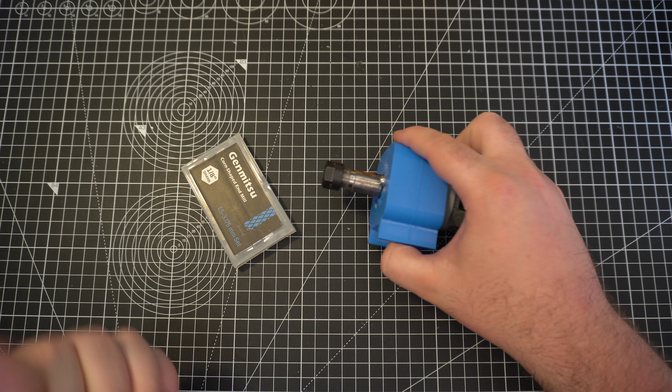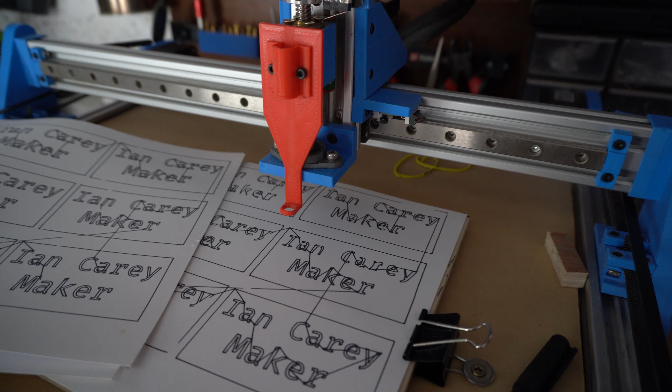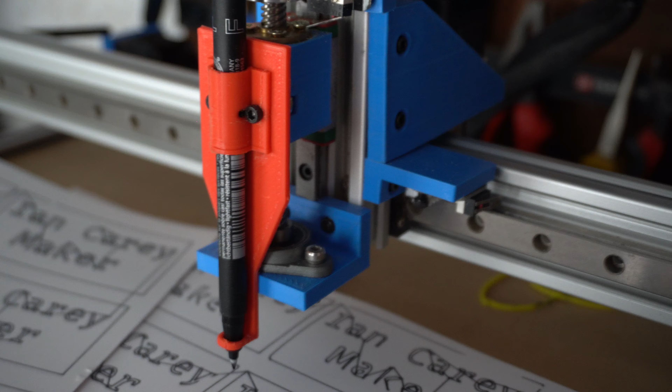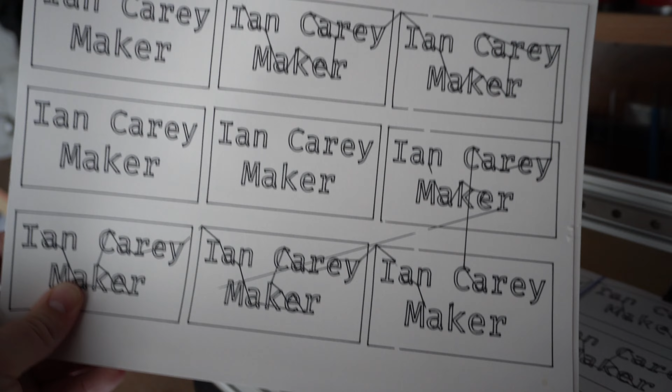So it hasn't turned out to be a super useful tool for a lot of different reasons. It was a great learning experience to put it all together, but there were quite a few problems with it that I want to address, because it's kind of annoying me that it's sitting out in my workshop and doesn't really get a hell of a lot of use because it's not super useful. So the spindle here not being attached to it is a bit of a clue as to how much use it's getting, because this isn't even attached to it currently.

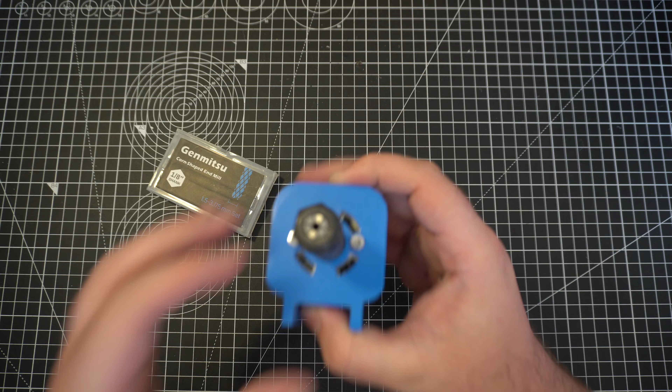The most recent usage it got, I should say, is at the Dublin Maker Festival last summer. I had it running as a demo piece, and I had made a special pen adapter for it, and it was pen plotting out business cards for me. So that's the most use it's gotten in a while. And there were a couple of reasons why it sort of didn't end up getting a lot of usage.

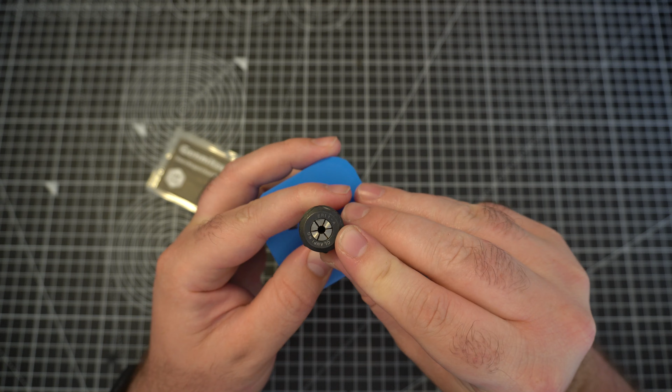I had gotten some feedback on it, and I actually decided that I wanted to address some of the points, because I think there's one really simple thing which I want to talk about in this video specifically that might make a huge difference. So we're going to try that, and hence why my spindle and some end mills are in front of me. So I'm going to go into a little bit of detail here about the end mills that you use, which are the little cutting tools, and why I think that might make a bit of a difference. So that's what we're going to try in this video.

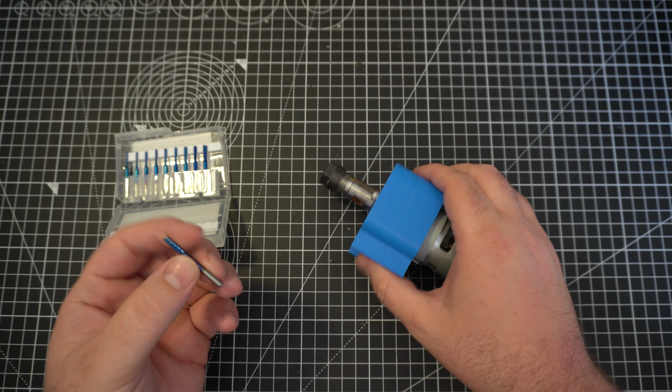Okay, so this is the spindle. Spindle is quite simple. It's a motor that has pretty high speed, 20,000 RPM on this guy. And mounted to the end of it is a little adapter which holds a collet. So this is an ER11 collet. It's just basically the size of the collet. So you unscrew this little nut and the little collet opens up, and then when you tighten it down, that'll squeeze evenly, holding the end mill concentrically.

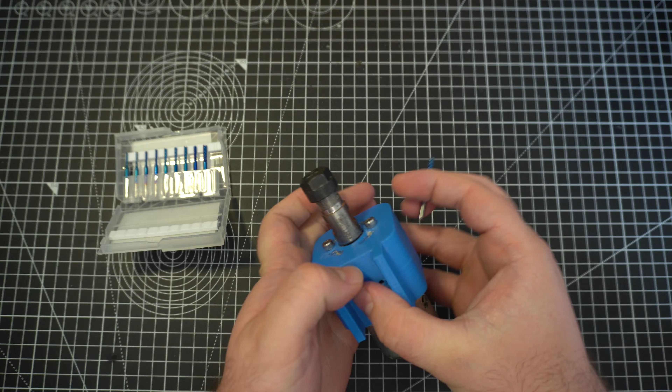So when I was building the machine, I bought this little set of the cheapest little end mills that I could find on Amazon, literally not knowing at all what I was doing. So these are the little blue fellas, and these are all 1/8 inch shanks, which is about 3.1 and change millimeters, and they are the right size to fit into this ER11 collet. So you open it up, it's just loose enough for that to fit in, and then you can tighten it down and it'll clamp down with pretty good holding force there. So that's how you mount your end mills into the collet.

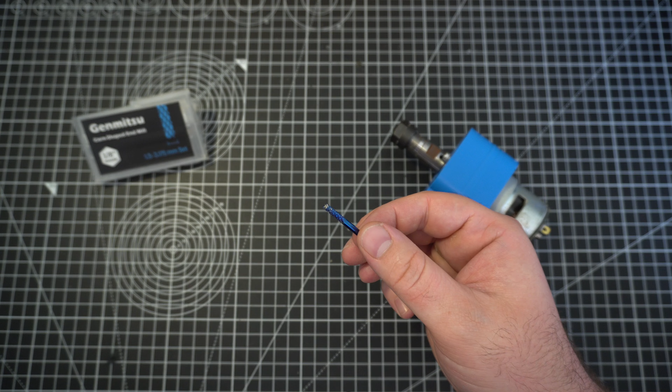So really where I want to draw your attention to is the profile on the teeth of these end mills. They're slightly different diameters, but they're all the same cutting geometry basically. So if we zoom in a bit, it might be easier to see if I can get this to focus, but basically there's our geometry. So you see what they call these is sort of corn-shaped end mills, and they've got this real rough pattern of all these little individual teeth that kind of looks like a little diamond pattern.

So what I was trying to do with my CNC machine is I was trying to cut wood with it basically. And these little guys, they're not really made for cutting wood, funnily enough. And so the machine had a lot of trouble with that. What these are kind of more designed for is things like PCB engraving.

So you've got these tiny little dudes here, and these are the perfect kind of size and the perfect type of bit that could basically carve away some copper traces and a little bit of fiberglass on a board so that you could make milled PCBs, which kind of makes a lot of sense.

These have a very small little tooth on them. They're quite fine. It kind of almost reminds you of a little grinding tool that you put into a Dremel. So it kind of makes sense that they'd be able to engrave into hard materials, or cut through quite brittle materials like fiberglass in a PCB.

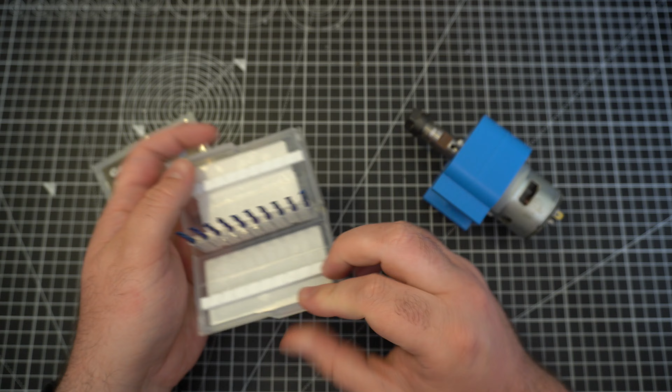That's my theory anyway. That's what I think was going on with why this wasn't working very well for cutting wood. These little tiny chips can't really bite deeply into the wood, and also they weren't really able to clear any swarf that they were creating, so you didn't really get chip clearance. So it was causing a lot of chatter in the machine.

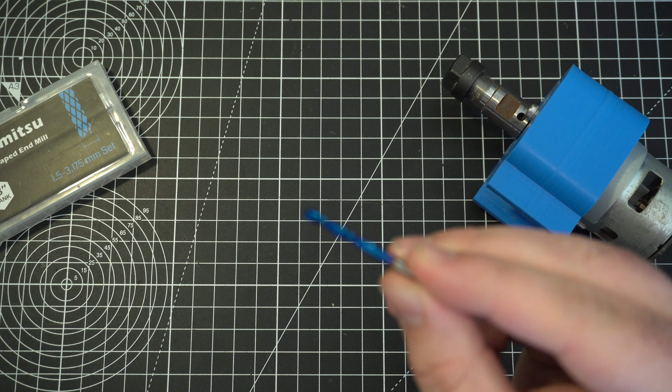It wasn't really working too well. So that's just a theory I have based on some feedback I got from some people and some ideas I've picked up from watching a lot of different machining and milling stuff on YouTube. So with that in mind, I bought some new endmills. These are the same brand, but just a slightly different profile. They're the same 1/8" shanks, but these are all the same size as it happens.

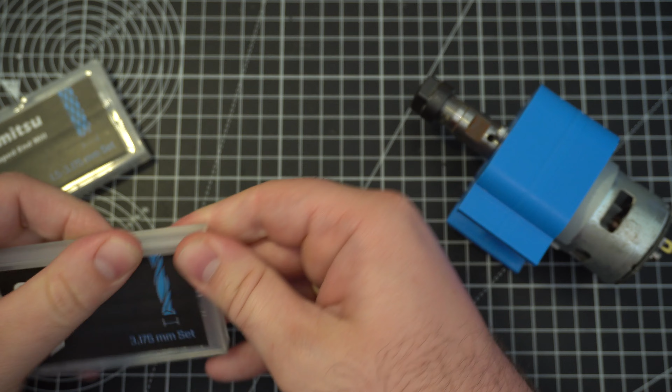And I can show you the difference. These are flat nose endmills, so they've got just this flat end on them. But what's important is, if I zoom in again, they have these two flutes. Focus is difficult. Come on. There we go. Might be as good as we can get, but basically they have two radial flutes that run the entire length. They're quite sharp and relatively deep as well, so there's a couple of millimeters of depth in each of the flutes.

So the theory is that this little guy, oh, that's a better focus, should be able to cut into the wood quite deeply and effectively clear the chips away from it as it moves. That's a theory anyway. So I'm going to try it. I'm going to reinstall the spindle onto the CNC machine, take off the pen mount, and try this guy out. And that's really it. I don't have a huge amount else I want to try.

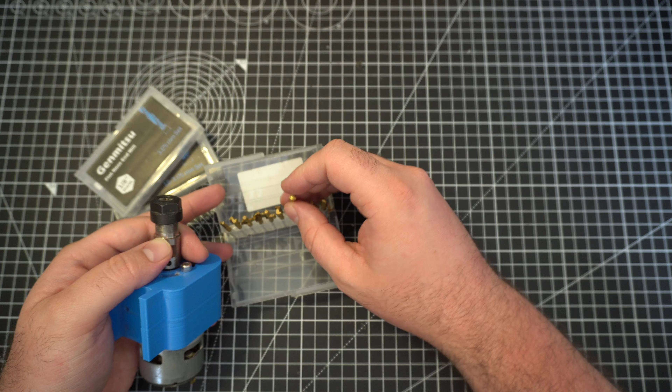There is one other thing. While I was thinking about these different endmills, I realized that I had yet another thing that might be helpful. I bought this little box of mini router bits ages ago. I had bought this little adapter kit where you can put a Dremel into it, and it turns a Dremel into a little mini palm router thing.

And I bought these tiny miniature router bits. It's a full set of all different kinds of router bits that all happen to have an 1/8" shank. So that's about perfect for going into my ER11 collet here, which will hold that just fine. So I can try that out and see if any of these will help at all. It might not, but it's interesting to see. And if they do work, I've got a whole selection of tools with different profiles that I might be able to use for other things, which is kind of cool.

So yeah, that's the next thing. I'm gonna set up my machine. I'm gonna check, see what happens with all these little dudes, and yeah, we'll see what results we can get out of it. One thing that I do want to do first, which actually I think I'll jump into next, is

I haven't used Fusion 360's CAM yet. So back when I was working on all this CNC stuff, I was mostly using FreeCAD, and I was using FreeCAD's CAM workbench to be able to do the CAM so that I could plot out my tool paths and everything for the CNC machine. Now I'm using Fusion 360 for everything, and I've actually never used the CAM workbench there. So I'm going to take a look at that.

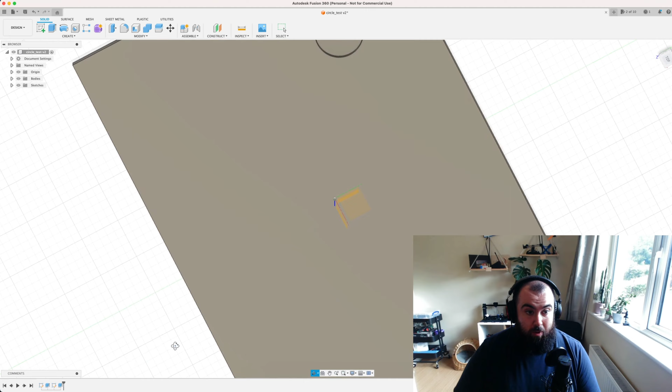Okay, so let's have a look at some CAM here. So I'm in Fusion 360, and I've created my model here, which is really simple. It's about as basic as I can make it, which is the idea for this whole test. I wanted to make a really simple model with a really simple thing that I'm going to cut out, so that I can eliminate as many variables as possible with the test.

Just a simple cut, so I can try and isolate what the endmills are doing, what effect they have, as opposed to any sort of weird toolpath stuff or depth of cuts, all that kind of stuff. So what I've got here is this really basic model. What I did was I created just a solid model which represents the stock that I'm using. In this case, I have a bunch of sheets of 6mm thick plywood that is A4 sized. So that's what I've got here.

I've got my little rectangle of stock, and all I've done in terms of the features that we're going to want to cut is I've added this tiny little round pocket here, which is 3mm deep. The other thing I noticed before when cutting through this material was that the 6mm depth of cut seemed to be maybe a little bit aggressive. At least it was with the old corn-shaped end mills that I showed you guys earlier. So I'm going with just a short 3mm depth of cut.

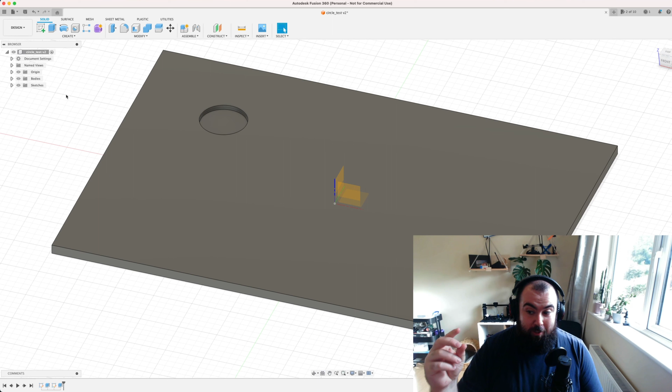Now that could prove to still be too aggressive, so maybe you need to go less, but effectively we've got this fairly small amount of material that we're going to be removing. This is, I think, 30mm in diameter, so it's not huge. And basically what we want to do is put this piece of stock into our CNC machine. We want to click the button and we want it to cut out this little pocket for us.

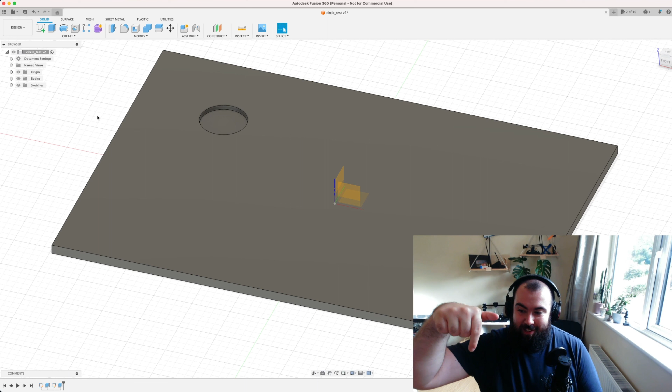So to tell the machine how to do that, we need to use the CAM tools that are built into Fusion 360. If you understand a little bit about 3D printing, maybe you understand the idea of a slicer. People who are familiar with 3D printing will know that just because you can 3D model it doesn't mean you can 3D print it. You can design in CAD or in Blender or in all sorts of different 3D modeling software, basically literally anything, but you can't just make anything.

Your 3D printer can't just start printing in midair, that kind of thing. And your CNC machine can't just get in at the backside of any material. There are limits to what these machines can physically do. So in 3D printing, we have a tool called a slicer, which effectively is the CAM tool that's very specific to an FDM 3D printer, for example.

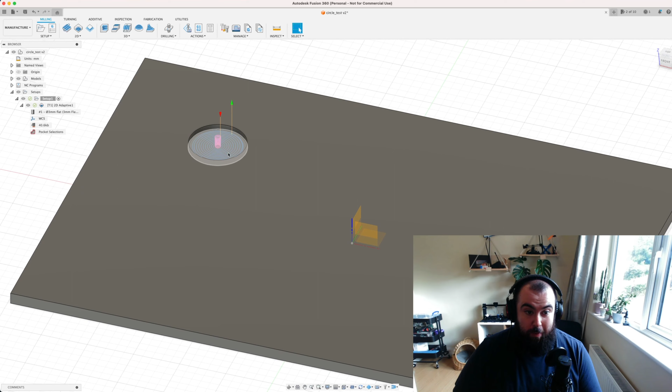So in our case, we're just saying CAM generically, but effectively what CAM is going to do for us in this case is it's going to take our 3D model and it's going to build a set of instructions, which when fed into our machine, in this case my DIY CNC machine, will make the machine do what we want. And this is the exact same as how a slicer generates your G-code, which is what tells your 3D printer how to make the parts you want to make.

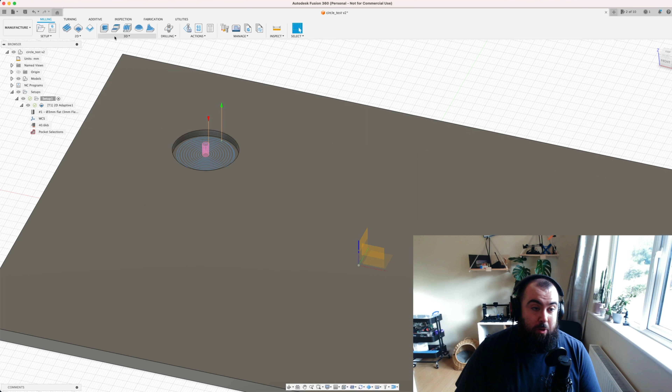So to get into this workbench in Fusion 360, you go up here to the top left where it says design, and we're going to select manufacture instead of design. So this dumps us into here, and you can basically see the guts of what is needed already. So I already prepared this, but I'll basically go through what I did and explain what this means.

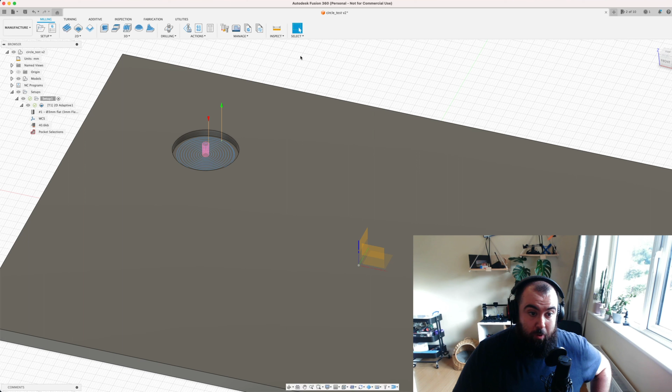So for this case, we're basically just working pretty much in 2D. There's nothing super complicated here, and 2D with depth. So this is the difference: you can have 2D stuff and you can have 3D stuff up here. The difference is basically with 2D stuff, we're just working in the one plane. We're not doing anything that has angles on that plane. So if we had angles or curves, tapers, that kind of thing, then we'd be using the 3D tools, but we're not, we're using 2D.

So although there is a Z dimension to it, we're always just machining in one plane. We're not making angles, like a cut like that or anything like that. There are no angled faces or anything like that.

So I can go up here. This is about the simplest method you can use, which is the adaptive clearing path. So like it says there, it's a roughing operation. It's not meant to be fine details. It's meant to just be an efficient way of clearing away lots of material. So we're going to use that path, which is about the simplest one you can use.

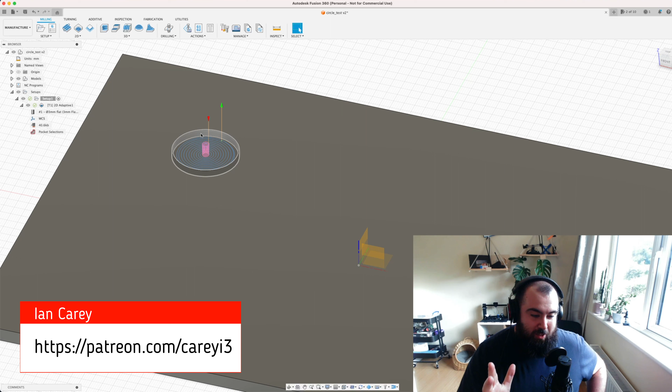So if we click on this, it'll bring us up a little dialog. I'm not going to click it because I've already done it. But effectively, the guts of what the dialog asks you to do is select a geometry that you want to adaptively clear.

So some tools make this a lot easier than others. In FreeCAD, which is what I've used before, it's a little bit cumbersome. In this, it's so easy. This geometry was ready to be highlighted. I moused over it, clicked it, done. Effectively, almost as simple as that.

The only other thing that it asks you to do, which is a little bit more involved if you've not done it before, there's a little bit to read up on, but it's not too difficult, is basically select your tool. So I can show you here, the tool we have selected is basically a 3mm flat end mill, which, if you remember from earlier, is basically what the new mills that I want to try out are. So if we click on this, it opens up this wizard.

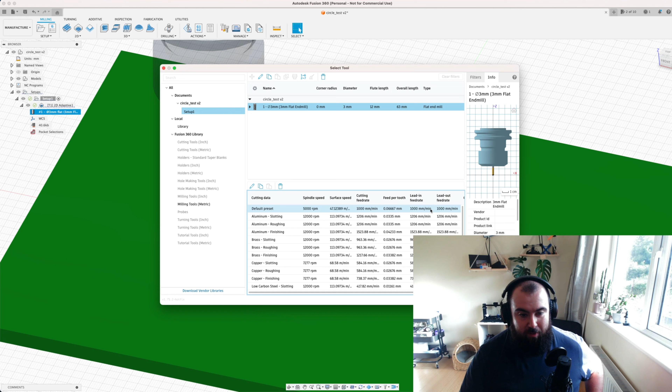And I'm not going to get into details about this, but effectively this is how you define how quickly the machine moves around while it's cutting and how quickly the spindle actually spins. So I have this selected, which is the default preset.

This probably isn't going to work, but I have it selected just because it'll give me some values and then I can mess around with it. I am going to mess around a little bit kind of by feel with this, because I'm not entirely certain what feeds and speeds I want to use.

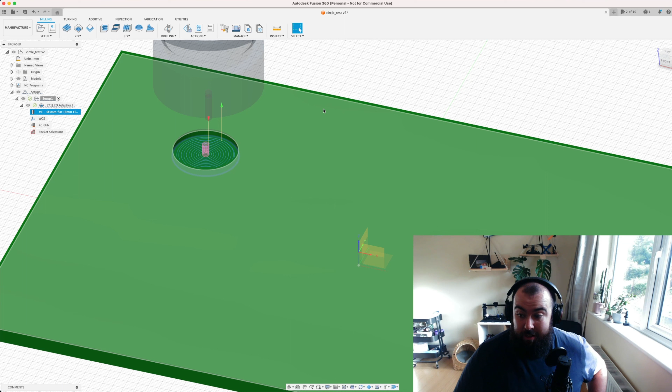So what I will probably do is I'll select a default, I'll generate my code for it, and then I'll run it on the machine without the stock, and I'll just observe how the machine's moving, and then I'll probably tweak it from there. So I'll either come back here and mess around with the settings, or I'll just tweak the G code directly. That's not too complicated to do, and then I can kind of iterate on that to get the feeds and speeds that I think I want, and I'll plan on testing a few different ones anyway.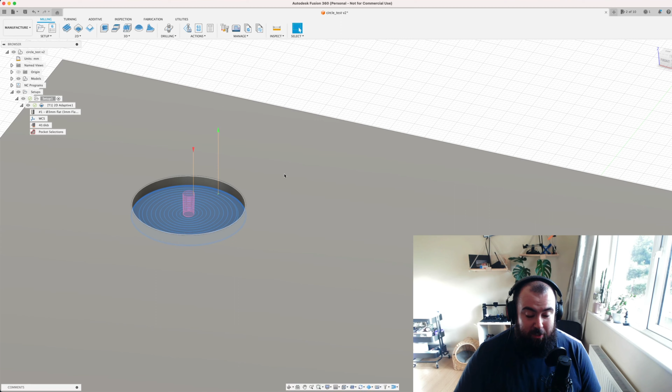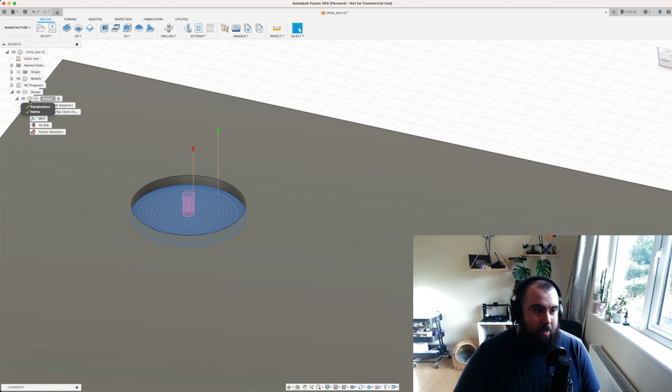So yeah, that's pretty much it then. You can select, and that'll do it. And that gives me this whole thing. So I've got my adaptive toolpath set up, I have my tools selected, and I've got the pocket that I want to mill out selected as well. And that's pretty much as complicated as it gets for the setup on this, which is remarkable.

I'm really impressed with how easy this was to set up compared to what I had done in FreeCAD before. Yeah, it's like night and day difference. Now, maybe people who know a lot more about this than me will tell me that there's better things in here or whatever. I don't know. There's probably better tools as well for professionals, but I think for a hobbyist, this is about as easy as it can get, which is fantastic.

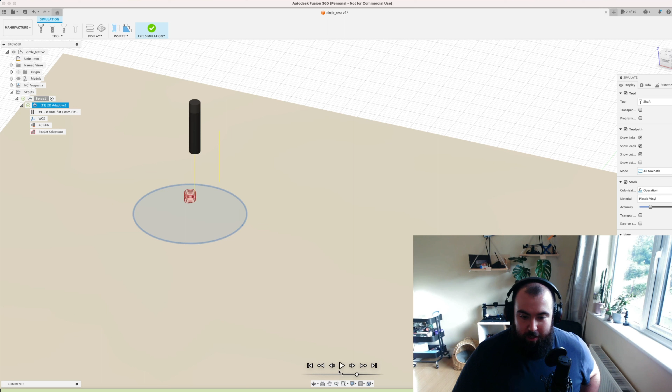So the last kind of cool thing that you can do here as well is you can simulate what this is actually going to do. So we see here we have all these kind of spirals and stuff, and it can be a little bit hard to see what's actually going to happen. So if I go into here to my setup and I click the simulate button, this is basically showing me from the start here how my tool is going to move and how it's going to remove the material.

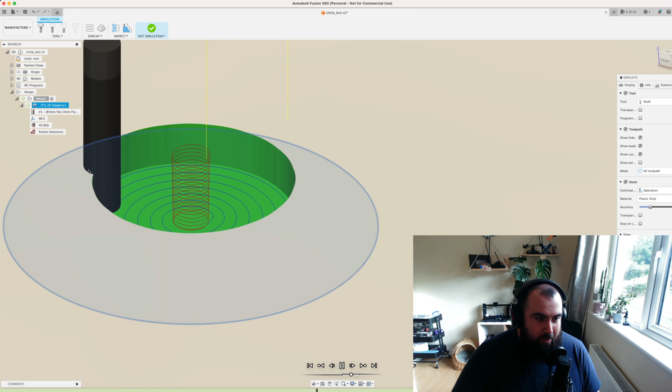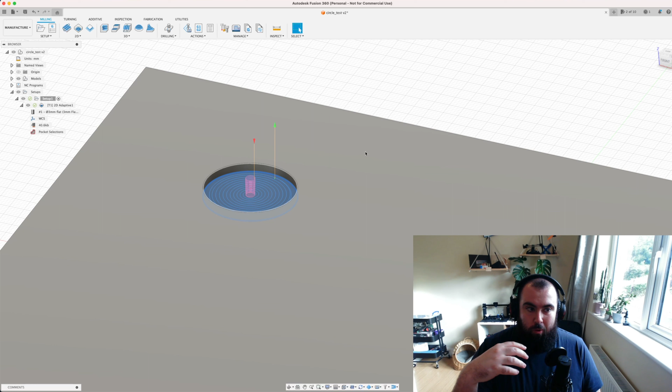So you see it starts up here, it's going to move down this line, it's going to start spinning around in a tight kind of spiral pattern until it gets to the depth at the bottom, and then it's going to fan out and remove material at a depth of 3mm until it gets out to the edge here, and then it's going to lift back up again. So if I click the play button, there we go. So we're down to the bottom, and now we're spinning around until we get out to our final width, and then up to the top.

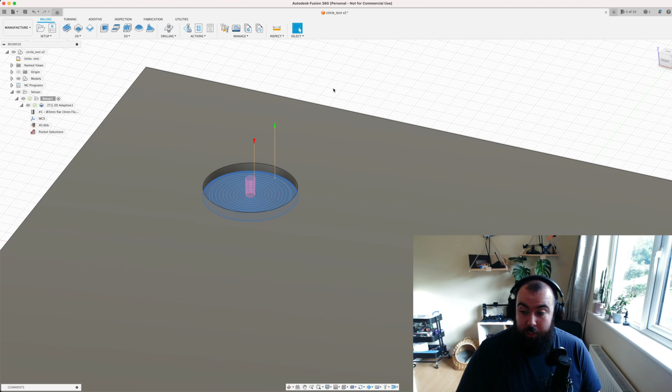And you can slow that down so you can really watch it. And it's kind of cool when you do that and you zoom in, you can see how much of the cutter is engaging with the material, which is pretty cool. So yeah, that's about it really in terms of generating your CAM profile basically.

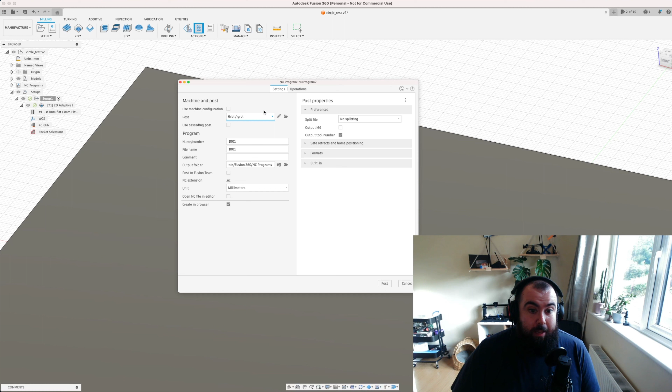So the next thing, once you've set all this up, you need to export all this to G code effectively for my machine. So if you hadn't watched my earlier videos, my machine is using an operating system called GRBL, which is basically an Arduino based thing that runs a pretty simple flavor of G code to do all of its movements. And it just so happens that Fusion 360 supports it as an output where you can target your post processor to point to GRBL.

So if you go into, I think it's up here, yeah, post processing, you can click here, and it basically gives you this little window where you can select what it is. So if you go to post here, you can choose from a library, and it has loads of different machines and types of flavors of G code you can select. GRBL is an option, so you can just use that preset, and then this will generate a file for you, which is all your G code.

And that's, again, pretty damn simple. So if we have a look at what that looks like, got it here. This is our G code file. So yeah, it's pretty standard stuff. If you've seen a 3D printed G code file, it doesn't look a hell of a lot different. We've got our X, Y, Z axis movements. We have spindle speed. We've got feed rates, all that sort of stuff. And yeah, that's really about it.

I think this is about just over 1,000 lines long. So if you're using some free software, you may need to chunk this up into different files. But I think the G code sender I'm using, free G code sender, I think it's Ultimate CNC, has an unlimited number of lines it can send. I think I must check that. Can't really remember. So we'll check that and see.

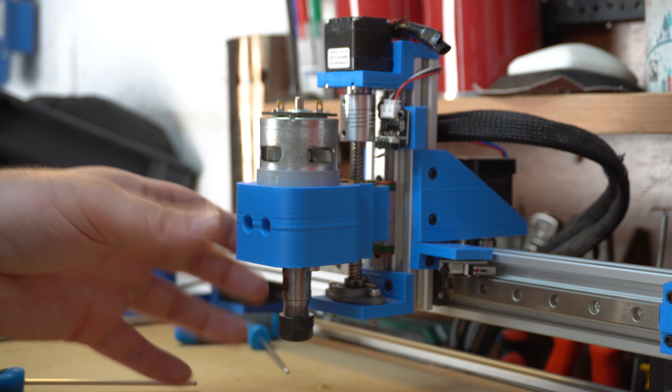So you can see here, the spindle will hold the little end mill here. All of the force that the machine generates is going through the end mill. So essentially you've got forces here in the X and Y, and also in the Z axis. And as I put some force on the end of the collet nut here, you'll be able to see the amount of flex that this little machine has. So that flex is really the biggest killer in this machine. So especially if you load that axially, you'll see there's a huge amount of movement there.

So if you had a really good, really solid CNC machine, you should be able to grab that spindle and try and force it as much as you can, and the whole machine shouldn't really move. Unfortunately, in this case, I just don't have the rigidity. So what I was noticing big time with those corn-shaped cutters was the machine's forcing to get the cutter to move through the material, and that was causing this thing to move a lot, because for the amount of force it was putting on, it didn't have the rigidity to hold up to it, and so the whole machine was bending, which obviously means that you're not going to cut anything accurately.

So I'm not fixing that rigidity problem today. I do have some things I want to do that might be able to fix that. But what I am going to do is, hopefully with that cutter, we'll get less force on this as we try and cut through the material. If it cuts through the material smoother, less force on this, less deflection, overall better experience. Again, only a theory. We'll see what happens in practice.

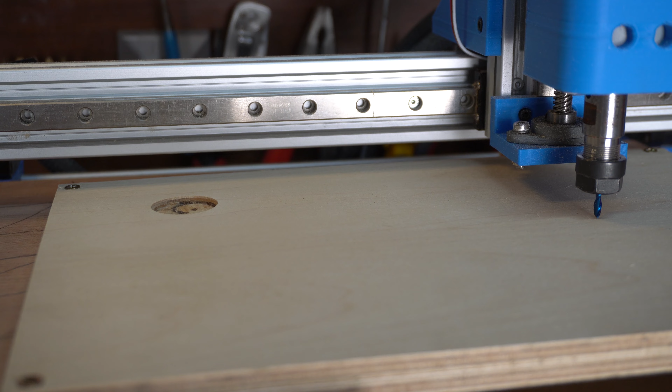That sounds crunchy. Okay, so here's the results from that test. It might not come across super well on camera, but I think it's actually pretty clear to see. This is not a terribly round hole, so you can see where, especially on the inside edge in here, we got a lot of chatter, and that's just that rigidity thing. Now that sounded and ran a lot better than it did with those corn-shaped end mills. So I'm pretty happy with that, but there's more to do here.

One thing I've not actually tried before, which I'm going to try next, is stacking up more wood so that there's less tool stick out on the Z-axis. I'm going to try to bring that Z-axis up as high as I can and just see, does that help with the rigidity, so there's less leverage from the tip of the end mill. So we're going to give that a try and see what happens.

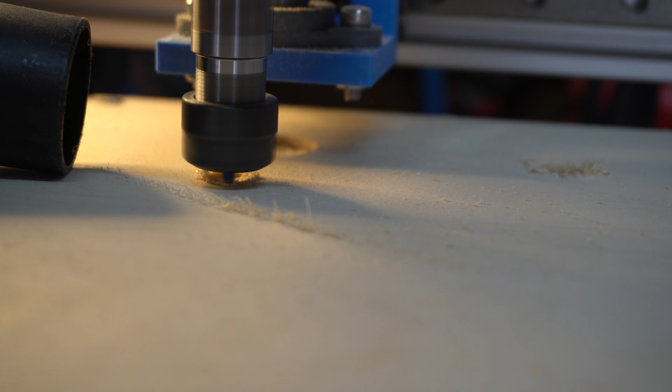Okay, this is a test with everything choked up. The workpiece moved a little bit closer up, and the end mill choked up into the spindle a bit more. So let's see if that makes any difference to all that chatter. Don't know if it will, but let's see. So a little bit of a spoiler, this didn't really make that much of a difference. And honestly, I knew it would make a bit of a difference, and it did. To be fair, there was a good bit less chatter, but the quality of the cut really wasn't improved hugely.

I think what I've hit here is the limit of what this can do in terms of depth of cut. I was making a 3mm depth of cut, and it was kind of okay with this setup, but I tried a few different things, and nothing really made it much better. So I think that's kind of where the limit came in.

The biggest surprise was trying out these different kinds of bits. Up to now I've been using these sort of blue carbide end mills, which might not be the ideal tools for this anyway, but I then swapped in some super cheap little mini wood router bits with an 8mm shank that I had, and they turned out to be the real stars and gave me the best cut. I suppose I should maybe have expected that, because they were wood router bits made to cut wood. But anyway, that was a little bit of a surprise to me, and that's what ended up giving me the best results.

Okay, so I think that's a wrap for these tests. That was my last test there with this guy, the big chunky wood router bit, and it seems to have given me the best results. So that's promising. There's more tweaking to do. The hole's not perfectly round, which I'm noticing now. I haven't really tensioned the belts in this. I literally spun the machine up after about 6 or 8 months of it doing nothing, so it could do with a little bit of tuning up, but I mean, it worked, so that's good.